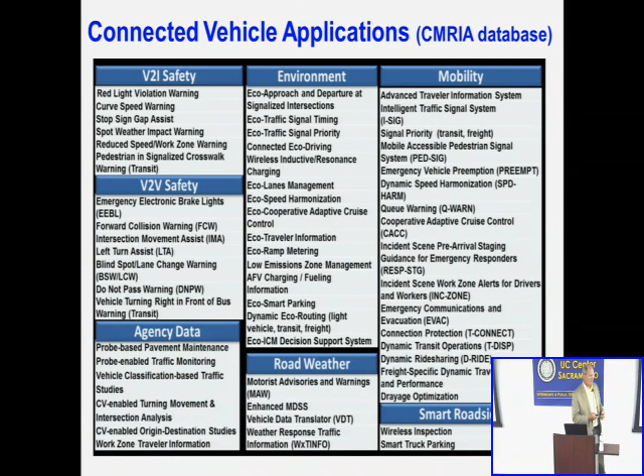A lot of things on the environmental side - we're going to talk more about this eco approach and departure. That's where traffic lights are talking to the cars and telling them signal and phase information, and it allows the vehicle to adjust towards that traffic light. But like I said, there's a whole list of this. If you go to this CMRIA database, it's online, it explains this and talks about the protocols and things like that. So there's a lot of creative applications that will have pretty significant benefits in these three areas of safety, mobility, and the environment.

And it's not just the U.S., right? So there's a lot of worldwide applications going on. We talked about the different deployments in the U.S., but there's probably an equal amount of effort going on in Europe and in Asia too.

Okay, so then let's talk about the automation piece. So maybe one of the first things I want to talk about is differentiating between what is an automated vehicle and what's an autonomous vehicle. So you might have heard this where, when we think of autonomous, we think of a vehicle that has its own sensor set, its own sensors that has the ability to see other cars and interact with other cars and the infrastructure.

But it's pretty much self-contained, right? It's based on the vehicle itself having that capability and being able to do some degree of automation just solely based on those sensors. And then when we talk about automated, it might include that same level of capability, but also including the communication piece. So the main reason I want to differentiate there is that I think we're going to see a lot more upside on a full automation that incorporates both the sensing, the onboard intelligence, as well as the communication. And I'll show some examples of that.

A lot of sensing technologies come up to really make a lot of this possible. Radar systems, LiDAR system, laser ranging, and that goes on. Computer vision is a big part. And it's been in many papers and articles talking about the different levels of automation.

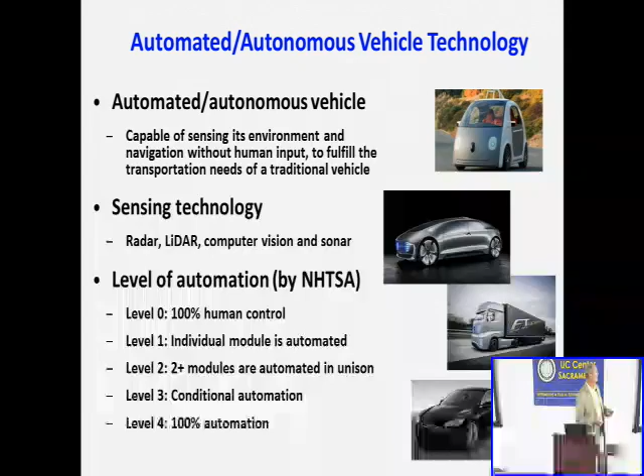So one of the first questions you might ask is, well, what's automated vehicles going to do to traffic? Is it going to improve it? What's going to happen with safety and all these other factors?

So back to the differentiation between autonomous and automated, it's been shown, both in simulation and some real-world experiments, that if you have just pure autonomous, where you're doing it purely by sensing, we're probably not going to see a lot of big improvements in terms of mobility and environmental impacts. You still have to sense vehicles, and there's still that little bit of time lag that causes those same problems we have now with humans. But if you replace that with communications, you cut that reaction rate way, way down to where you can get better traffic flow at higher speeds and smoother traffic flow that has that positive environmental benefit.

And so, we already have some technology on board now, right? These adaptive cruise controls, this is where you set not only your speed of what you want to go at, but how far do you want to follow the vehicle in front. So the adaptive cruise controls now still have to use radar to sense the vehicle in front, and they slow down and they speed up, but there's still a time lag, and again, it's been shown where that's not a huge improvement in terms of improving the flow rate on the roadways.

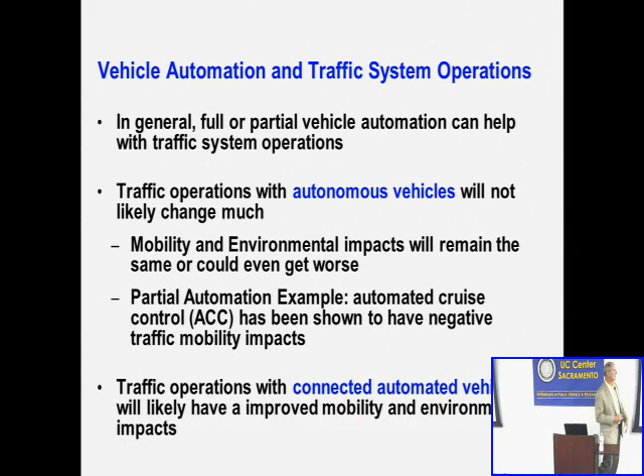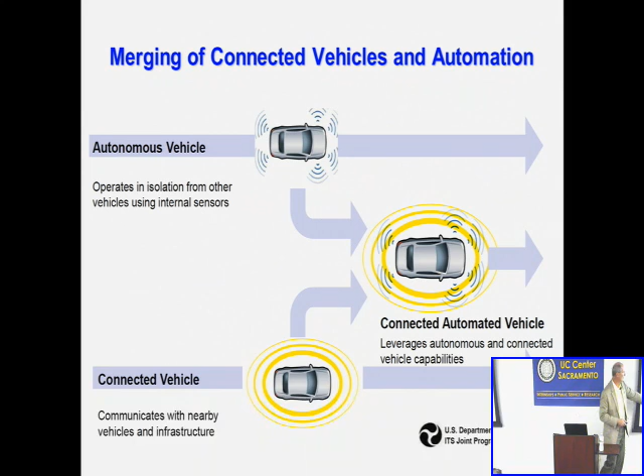But if you now look at what's called cooperative adaptive cruise control, include that communication piece, that's something where it's very clear that you can get much better flow rates out of that type of situation. So I think the key lesson is, when we talk about all this automation, we're going to call it connected and automated vehicles, because you really need both of those components to make this work. And really, that's kind of what this diagram is showing, is where the autonomy comes together with the connectivity, creating the connected and automated vehicle.

Okay, we're going to talk a lot about these three cornerstones I already mentioned: safety, mobility, and the environment. So we have to have measures of effectiveness, right? We have to have some way of measuring the performance of these things. A lot of this is measuring these things in the real world as well as in our simulation. We have to do a lot of simulation, mainly because we have to anticipate all these weird scenarios that need to be tested when you introduce a new algorithm or a new application for these vehicles.

So these are pretty obvious, right? Number of collisions, the spacing between vehicles, all these different safety factors. Mobility has a lot. The typical one we think is what's our travel time for getting from one point to another, delays in the system, level of service, all these things. And then the environmental parameters, of course, are how much energy do we need to do our trip, and then what are the pollutant emissions and what are the greenhouse gas emissions.

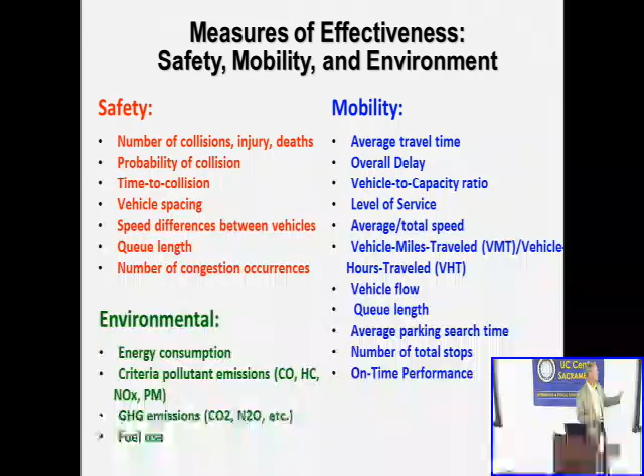So we typically, when we evaluate an application, would sit there and come up with, if you're doing it in simulation, different kinds of modules that estimate those values, and then we can quantitatively compare how much safety did we improve. So we usually run a baseline that says, here's a situation without any automation. We measure these parameters, and then we introduce the automation, do it in simulation, do it in a pilot, measure the same thing, and we usually say, hey, this application just improved the environmental parameters by 15, 20%. And safety went up by a certain amount. So that's really how we want to do this type of quantification.

And so to date, a lot of what we've done in terms of this application development, it's usually for a specific reason. So we do things such as emergency electronic brake lights for safety purposes, right? We don't want to collide with the vehicle in front, so that's a definite safety application. And then we might do something like speed harmonization on the roadway to improve mobility. And we might do this eco approach and departure at traffic lights for environmental reasons. And so these applications, just as that list showed, are usually categorized in one thing.

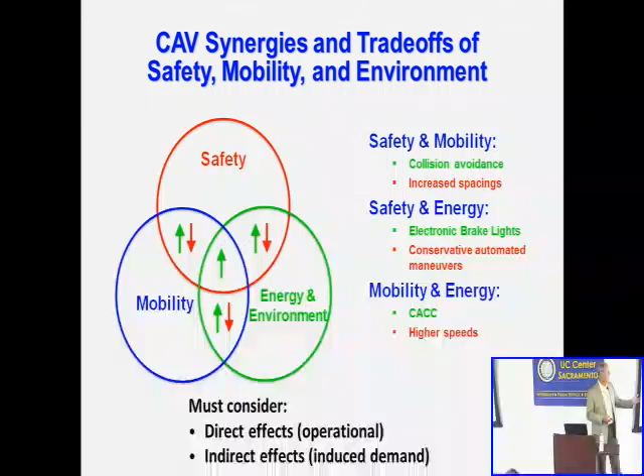So let's take an example of platooning. I'm sure everyone's heard of vehicle platooning. The whole idea is, can we get cars to travel in these strings much closer together? And it has all sorts of benefits, right? One is, if you have vehicles moving at decent speeds kind of close together, that increases the flow, the vehicle flow down that roadway.

And then if you do it with trucks, you get another benefit too—this drafting effect, right? If you get two trucks close together, there's an energy reduction in terms of the load placed on them, and there's actually a slight benefit for the leading truck as well. That drafting effect has been shown both experimentally and in simulation to give potentially a 15% fuel economy benefit by doing platooning.

But then back to that trade-off issue, right? As you get these trucks or cars closer and closer together, the potential for something to go wrong, where there's some kind of collision, increases. So potentially safety might be a disbenefit as we decrease the spacing between vehicles.

So that's just to illustrate the type of analysis we're trying to do: if we implement this as an application, what happens to those different factors that we see there? And then, back to that tuning concept, it might be that we adjust the spacing so that we reach some peak in terms of safety while still getting some benefit in those other areas too. So that was just one example.

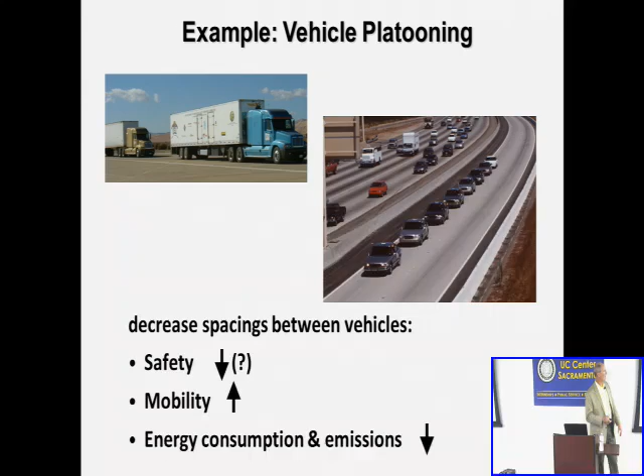This highlights a little bit more about these indirect effects—this whole concept of an explosion of various uses, right? If we had automated vehicles, we might do a lot more. We might not have to worry about a long commute; we might put our time into something else while the automated vehicle is doing the driving. And things like young and disabled travel—all these things are certainly going to drive up the VMT. So the whole question is, how do we deal with this behavioral effect where it's pretty clear that the number of uses is going to go up?

And then back to the operational effects—that's where we can get a net decrease through the smoothing effects and things like this. This was a chart from a study done a couple of years back, and again, it's just looking at some of the different things we can do with automation. Everything on this side of the line is a benefit, and everything on the other side is a disbenefit.

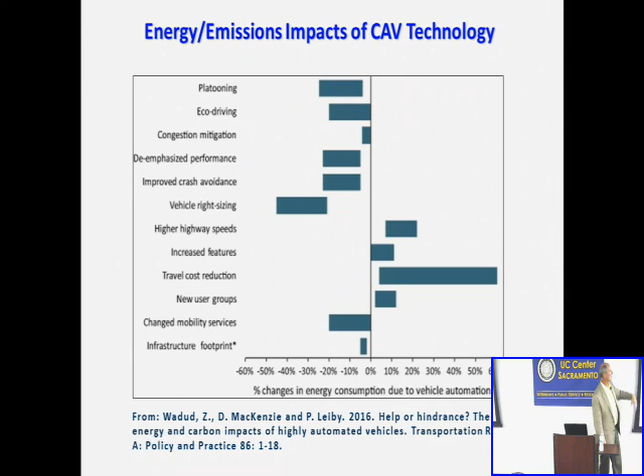So platooning, again—if you look at energy and emissions, we have a benefit simply because of that drafting effect. But if you go down to things like the cost of travel and the ease of travel, that's going to cause induced demand, and therefore that's going to be a net negative from an energy perspective. But this is the type of analysis we want to look at—again, not just the operational side, but the behavioral side as well.

Okay, then the other question is automation itself, and where do you apply that automation? It's not something where you apply automation and all of a sudden that vehicle has complete capability to drive. There are these incremental steps, and it happens at the powertrain.

There are different opportunities to do things such as energy management in your plug-in hybrid vehicle. Emission control systems are things you can control with some automated effects, things like starting and stopping engines. Vehicle dynamics is one we typically think of—this is where we can follow a very prescribed speed trajectory, and the control system will be able to follow that a lot more precisely than a human driver. So a lot of automation happens at that vehicle dynamic level.

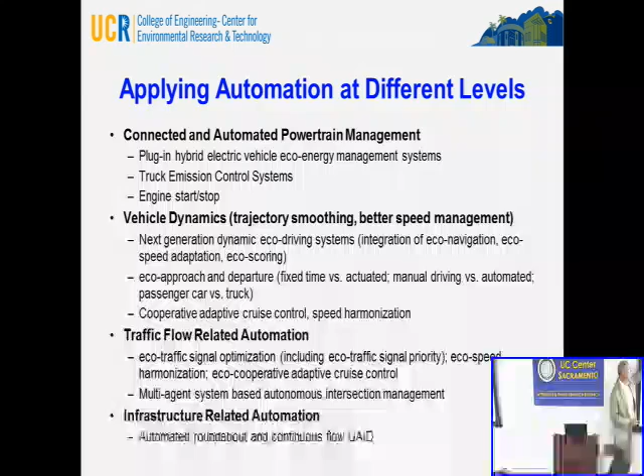Then you look at other things such as traffic flow, so you can start to think about infrastructure automation, improving flows along the roadway itself. Eventually, if we have automation, it may even reach into the infrastructure itself, where we change the size and shapes of our roadway systems and other parts of how we interact. So keep in mind, it's not just simply throwing automation at the vehicle in terms of vehicle dynamics—there are all sorts of things going on at different levels.

So just very quickly, I talked about how it's important to analyze this in simulation, and it's important to have field studies so we can see this. This is just to show you some of the tools. There are some pretty sophisticated traffic simulation tools that can be coupled with emission models and other things that give us an indication of safety and other factors as well. It's really bundling up all these evaluation tools, putting them together, and doing the proper analysis.

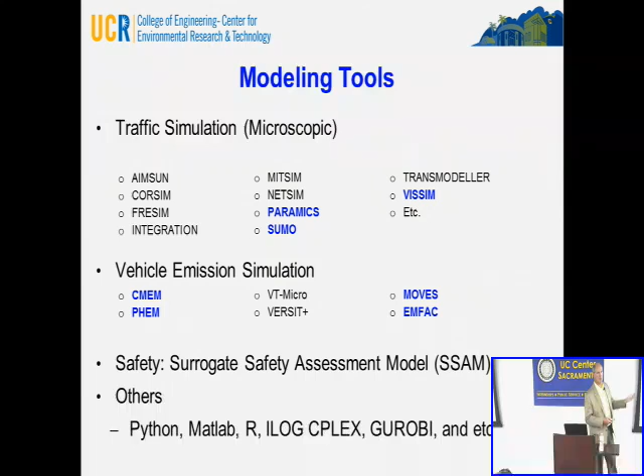Again, I won't go into too much detail on this, but really you take a specific application, put it into the simulation platform, and the end result is you get these safety factors, the mobility factors, and the environmental factors.

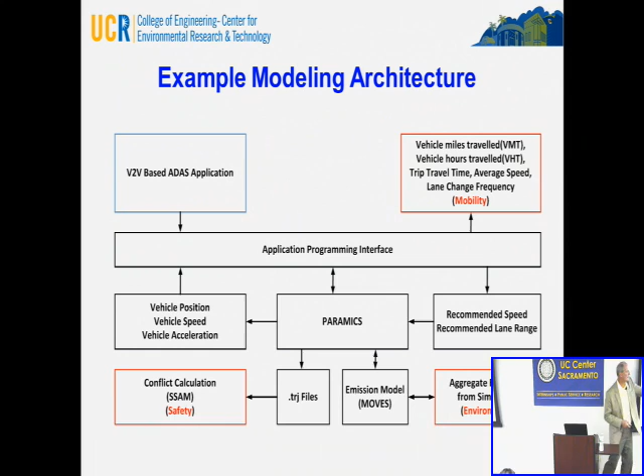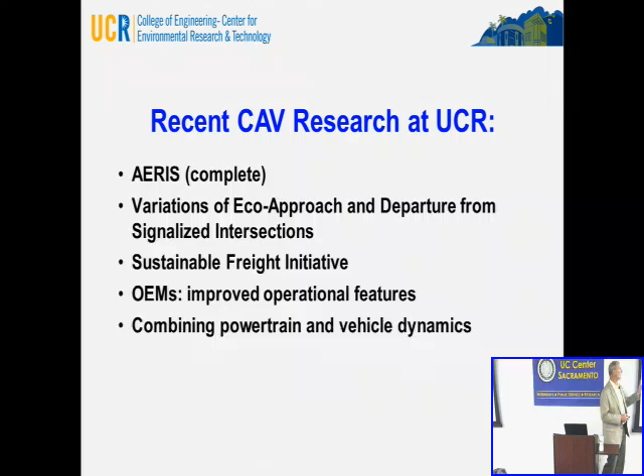So let's give some examples from the work we've done recently. One is a program out of the U.S. Department of Transportation called AERIS, which had about 15 applications designed specifically for improving and reducing emissions and reducing energy consumption. We'll go through some of those examples.

Okay, so this is one of the leading applications that has a pretty substantial effect on energy use and emissions. It's called Eco Approach and Departure, and it simply takes advantage of communications between a traffic signal and a vehicle itself. The idea is the traffic signal knows what its signal phase and timing will be, and if it just broadcasts that out for vehicles to listen to, a vehicle can use that to do things such as speed up slightly to get through a green light, or slow down ahead of time so it's not doing a hard braking event when it gets the signal.

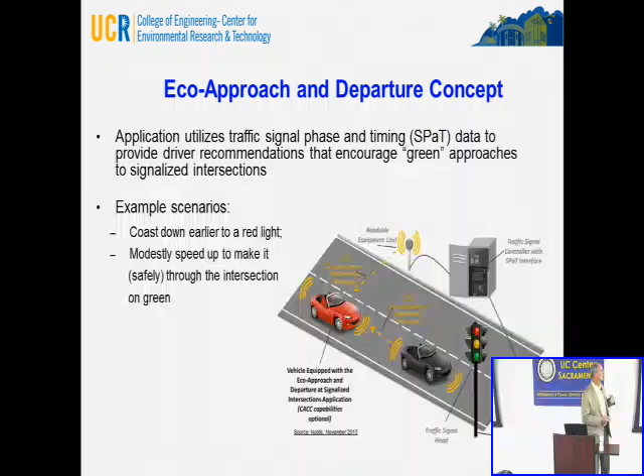This has been studied a lot, and there's a lot of work in the literature. Again, showing different scenarios where a vehicle can speed up slightly or slow down slightly, adjusting its speed to take advantage of getting through that traffic light. In general, a vehicle by itself, operating without any other vehicles around, typically sees a 15 to 20% improvement in energy consumption if you do this. And this is easy to do—it's not hard to retrofit our traffic lights, and it's happening in various cities so that information is being broadcast, vehicles can listen, and then adjust their speed.

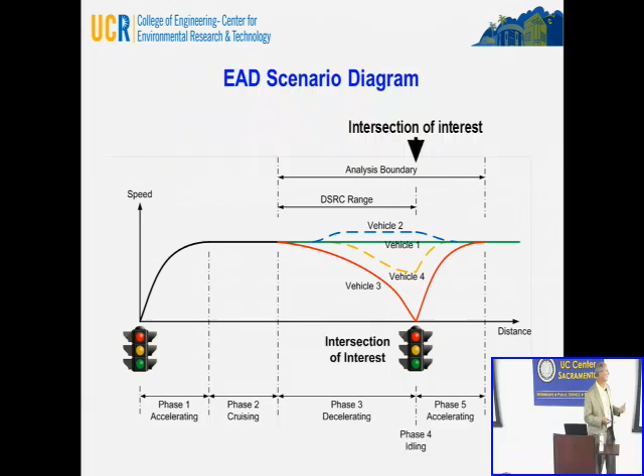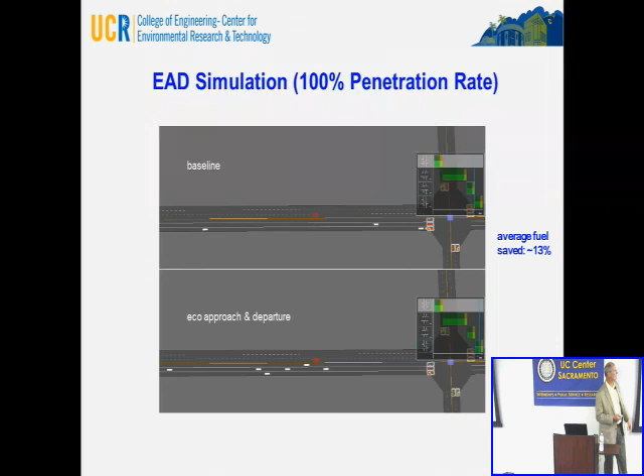This has been implemented in a couple pilots. One of them has been at the Turner Fairbanks Highway Research Center in McLean, Virginia, where this was studied pretty comprehensively, taking a vehicle and running it through the traffic light many, many times to prove that it is a 15 to 20% improvement.

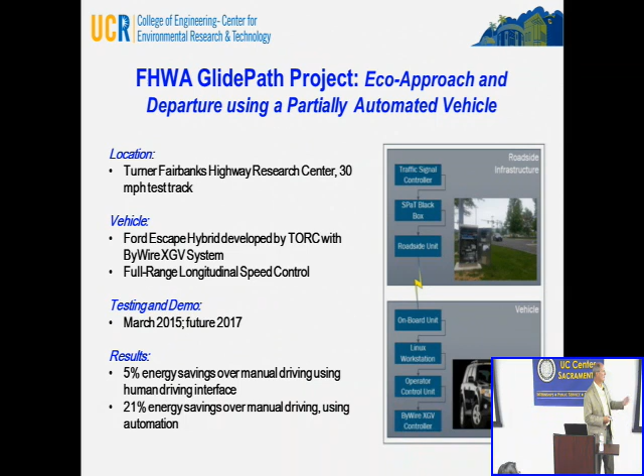And it's ongoing, right? So now it's doing it with traffic to show what that benefit could be even in different traffic conditions. And then there's all sorts of variations. It depends on the signal timing, it depends on your algorithm, how much congestion you have, how much levels of automation.

I should mention that in some of that testing at Turner Fairbanks was with automation on board. The comparison between a human driver getting advice on how to speed up and slow down might be, as I mentioned, 10 to 15%. When you automate that, you get a lot better following of that trajectory - that pushes it up to around 20 to 25%. So having the vehicle do that speed up, slow down automatically does give you that greater benefit.

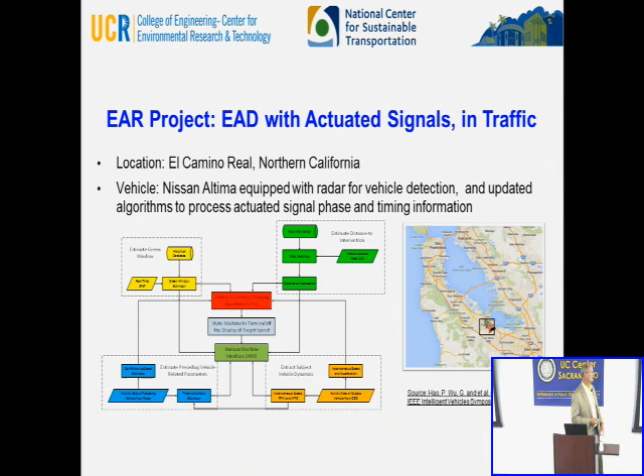We also did tests on El Camino Real in Palo Alto. If you're familiar with that, there's a number of traffic lights, about 100 to 200 meters apart, with fairly high levels of congestion. It just goes to show that when we implemented this eco approach and departure, we didn't see a huge benefit - it was just in the 2 to 5% level, mainly because this doesn't work well when things are already congested. There's not a lot of room for vehicles to speed up and slow down, so implementing this when it's already congested doesn't really do very much for you. But again, that gives you an indication of a real-world implementation.

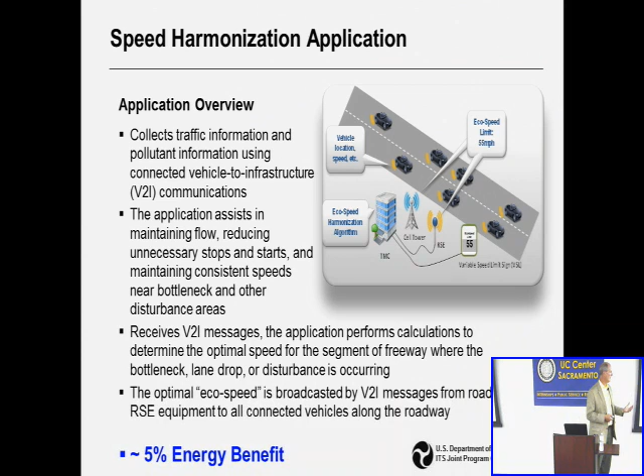Other very quick examples: speed harmonization. This is a mobility thing where you try to smooth traffic flow, get rid of those shock waves that occur on the roadways. If you analyze it under different penetration rates of the technology and different congestion levels, it's typically around a 5 to 10% energy benefit.

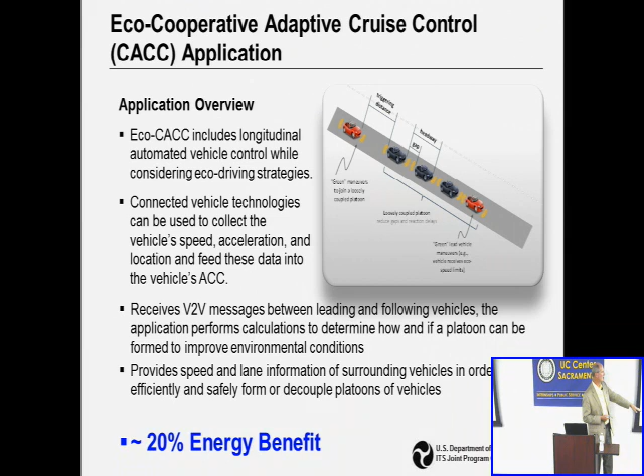Back to when I talked about adaptive cruise control - if you make it cooperative, you can get pretty significant energy benefits when you place vehicles in these loosely coupled platoons as they go down the road. So again, all these are results based on the traffic simulation models giving us those answers.

Other things, not just designing trajectories, but how you travel through the roadways. So this is Southern California, right? And we've looked at a lot of truck patterns going from the ports down here in Port of Long Beach, Port of LA, and driving out to, say, warehouses in the east end of the Los Angeles basin.

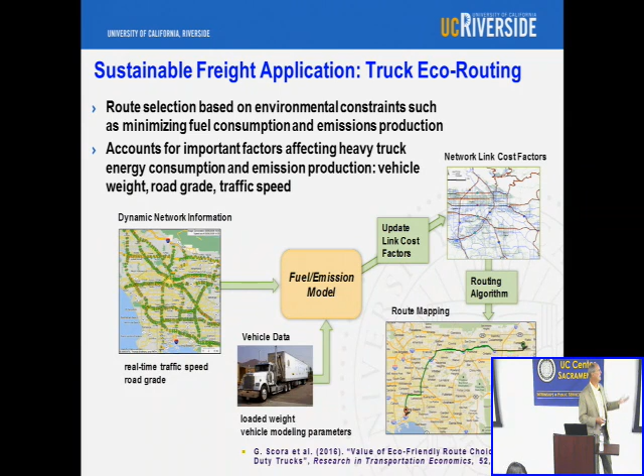And there's a lot of choices for what route you want to take. So truckers now typically choose the route that's going to be the least amount of time or the shortest distance. But part of what you can do is route trucks differently to minimize what their emissions would be, what their energy would be. And then you can even take into account things like disadvantaged communities, where you want to route trucks away from those. So a whole new slew of routing algorithms are coming out that are very valuable in terms of reducing the air quality impacts on the community and saving fuel for the vehicles themselves.

One thing we also do in addition to simulation - so we do these traffic simulations - is we're starting to now take the output of these models and physically drive a dynamometer. This is like a smog check where you put a vehicle on there, and a vehicle traveling down the roadway, you're running the vehicle at that same speed. This allows you to get a better estimate or better measurement of what the actual energy and emissions would be of that particular vehicle. So if you had, for example, a futuristic vehicle that wasn't on the road yet, you could test it in this fashion and get a good idea of what the implications would be in the future.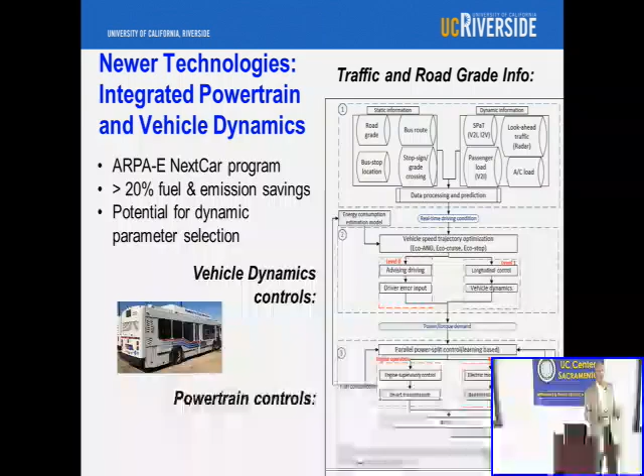Car manufacturers are starting to do this. They have their own applications - lane speed monitoring, different things like this. So again, these are things that we're helping the auto manufacturers develop with them.

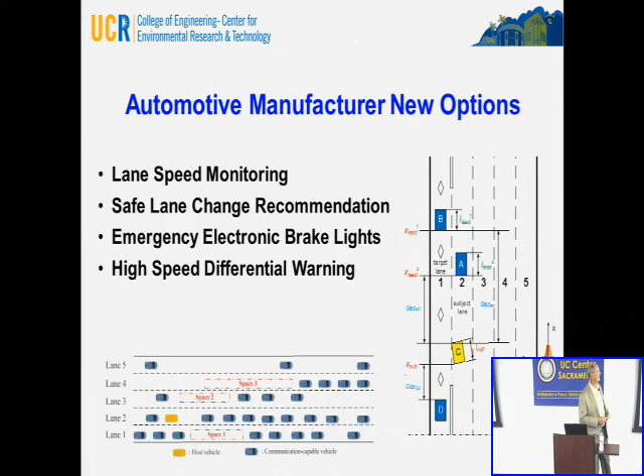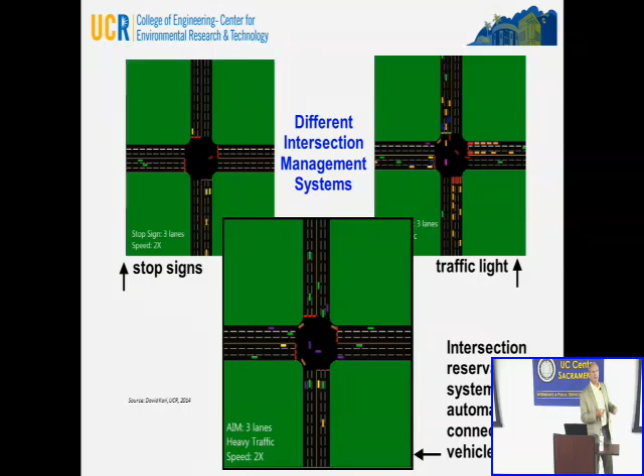This is kind of like an intersection in India or someplace like that. But we talked a little bit about this earlier - all it takes is one or two of these non-automated vehicles to really mess it up. So this is kind of maybe not the right way to go.

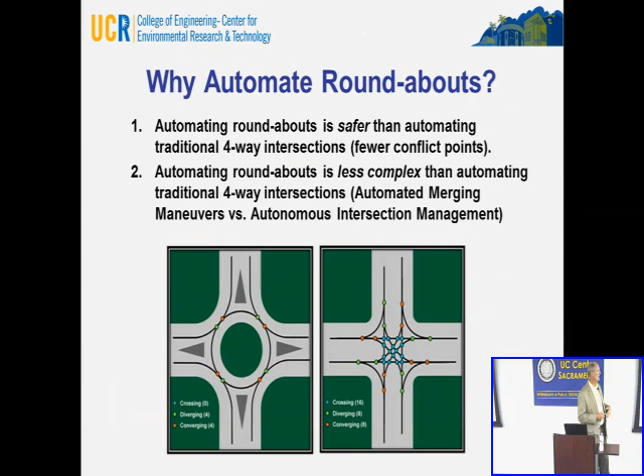Instead, something like automating a roundabout makes more sense. Roundabouts are good because there's less potential areas of conflict compared to an intersection. So if I was to redesign intersections with automation, this is probably a much smarter way to do it. We don't use roundabouts so much in the U.S., mainly because they break down pretty early in terms of traffic flow, mainly because humans don't merge very efficiently. But if you have automation, then you can get those efficient merges.

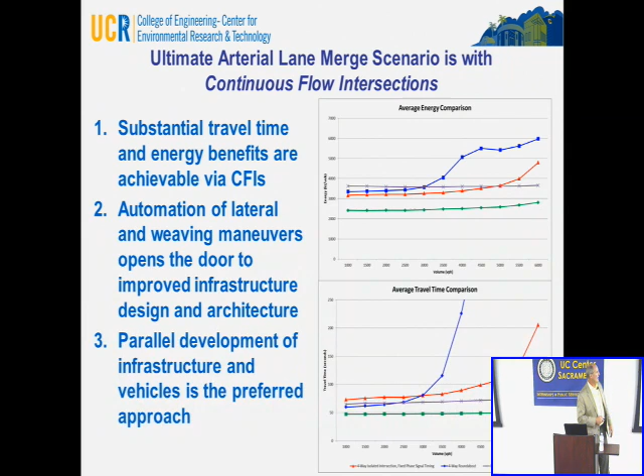And some students did some evaluation of that. So we'll speed up a little bit here. Okay, so back to this analysis.

So we spent a lot of time going through the literature, reading the papers, pulling out these different parameters, and trying to find what are the different things that are going on here. It's in a recently published report as part of the National Center for Sustainable Transportation. I think that's going to be up - if it's not up already, it's up on the NCST website that outlines a lot of those different results.

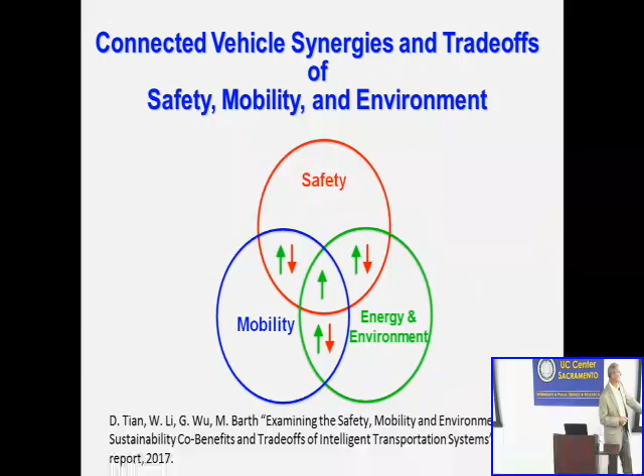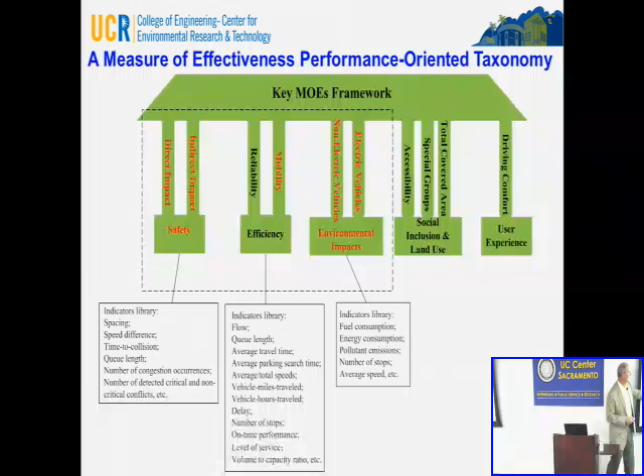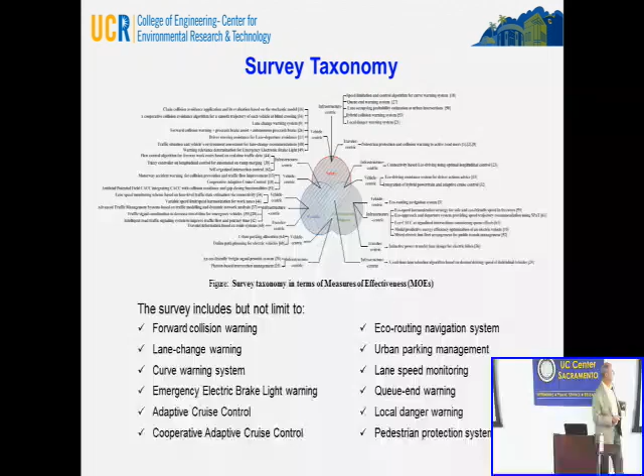What's the conclusion? The conclusion is almost all of the applications so far have really had a strong safety focus. Out of just the sampling, 25 there, 18 focused on mobility, and a decent amount focused on the environment. Not too many have looked at things such as trying to improve both, or potentially all three. We saw a few, but I think we're starting to see more and more where people are looking at that more holistic, all-encompassing view, where we want to consider all three of those together.

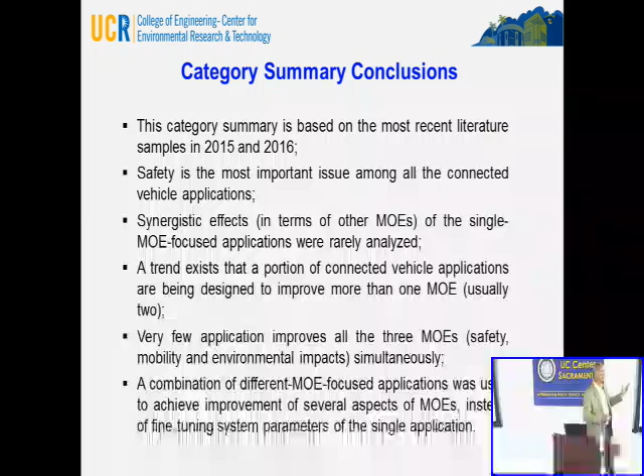So again, read the report. It talks about the different types of applications, which ones are good in some senses, which ones are not as good. But one thing I mentioned already - one thing you can do with a lot of these different applications, if you're sort of in one area, you can start to change parameters to kind of drive it to where you get the maximal safety plus mobility plus environmental benefit. And this is what's happening now when you're doing design such as automated buses and different applications like that.

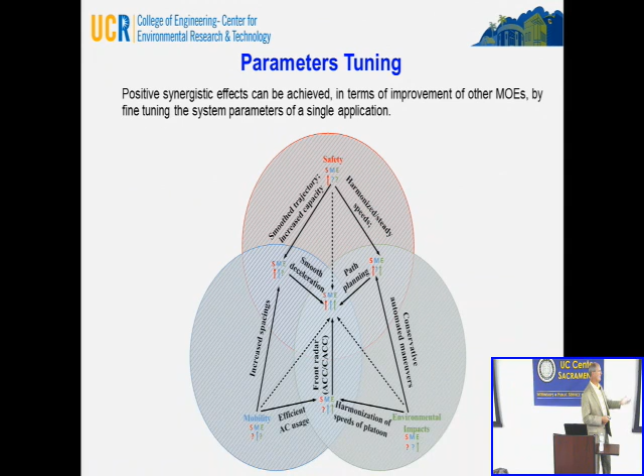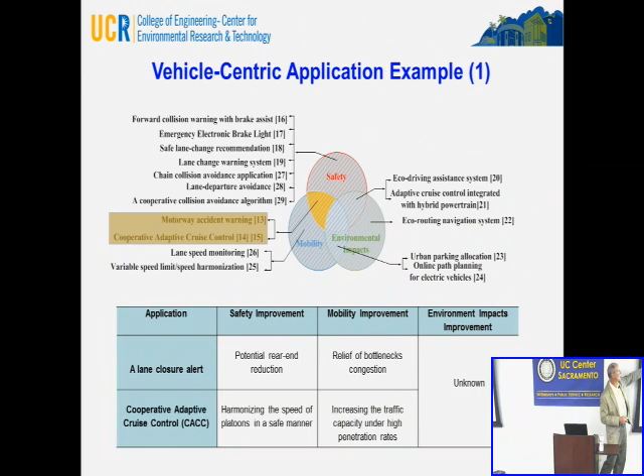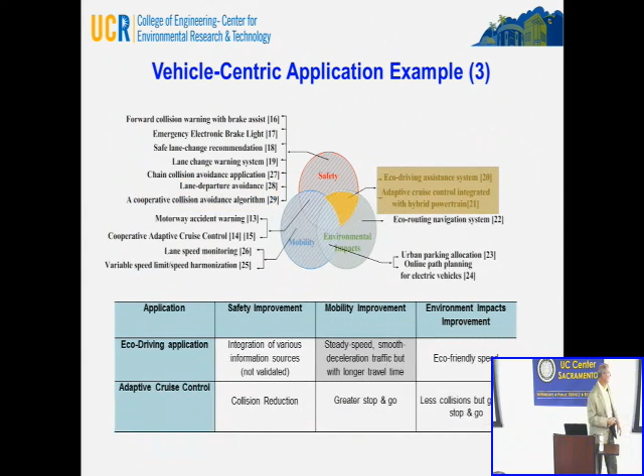All right, I think because of time, we're going to go through this very quickly. Again, this is all in that particular report that talks about these different things and some examples - lane closures, cooperative adaptive cruise control, pre-collision systems, emergency electronic brake lights - all these different things that are highlighted in that particular report.

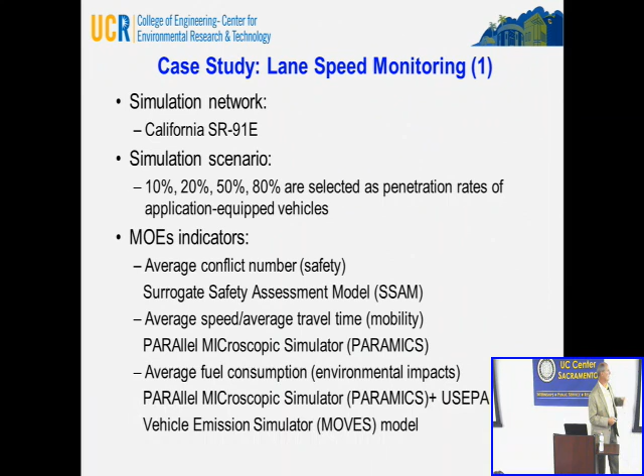One thing we dive more deeply into is some applications. This one is a lane speed monitoring one. This was research that we're doing with Honda. And we look at different simulation scenarios of different penetration rates of the technology and how much it affects the safety, mobility, and environmental aspects.

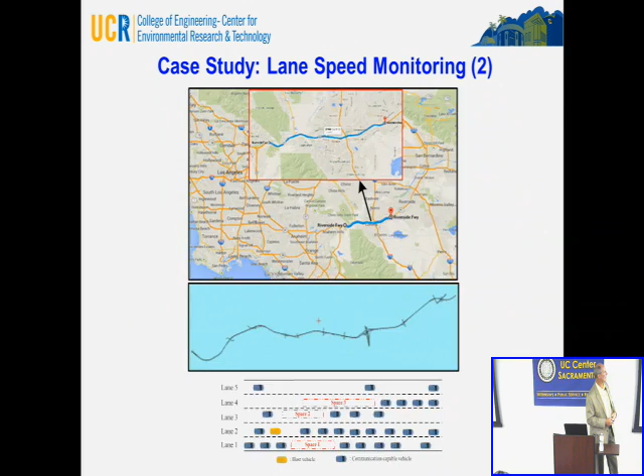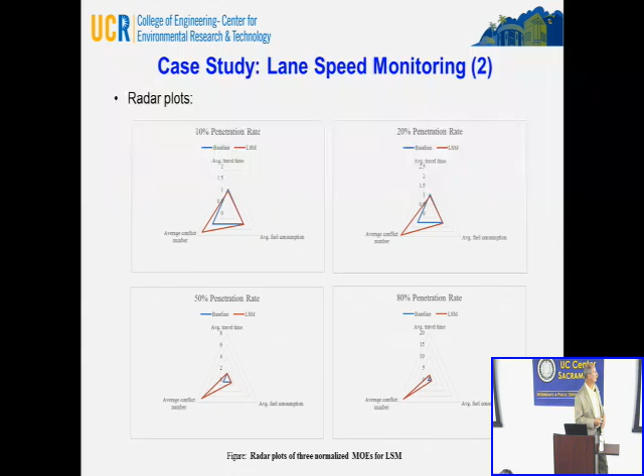All right, so this just summarizes the lane speed monitoring conclusions. To conclude, I think the whole idea is we've always dealt with these things kind of in isolation. We said, let's really focus on safety, and we haven't really looked at the other ones. But now we're starting to see, when we develop these new connected and automated vehicle applications, this more holistic way of looking at it and combining these different things together.

And then the next step is actually tuning the parameters so that we can get those overall benefits. I think we're going to see more and more of that as we move forward, and we're going to have some pretty big impacts as we move forward with both connectivity and automation. With that, I'll conclude. Thank you.